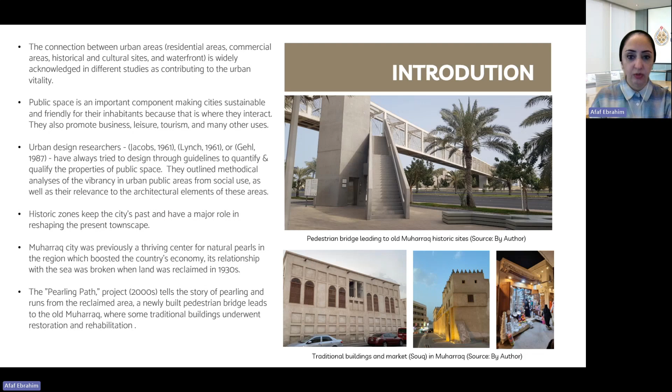Here comes the Saada Phase 2 development to fulfill this need. It is an extension of Saada 1, which is a mixed-use project located in the northeast side of Bahrain, and it is separated from the new site by Khalifa Al Kabeer Highway.

The new site is of a size of 11,223 square meters, and it is in close proximity to historical landmarks of Muharraq.

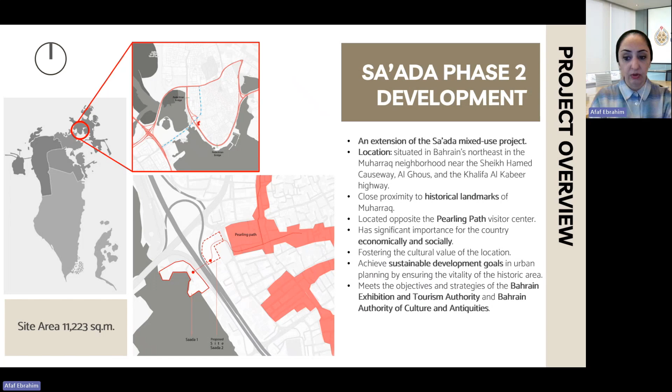It is located opposite the Pearling Path Visitor Center, and it has significant importance for the country economically and socially. It is fostering the cultural value of the location, and it achieves the sustainable development goals in urban planning by ensuring the vitality of the historic area. It also meets the objectives and strategies of the Bahrain Exhibition and Tourism Authority and Bahrain Authority of Culture and Antiquities.

The problems facing this project are that there is no connection to the waterfront, whether physically or visually, and it is lacking social interaction and cultural activities in this area. Also, it is lacking amenities and services as a public space.

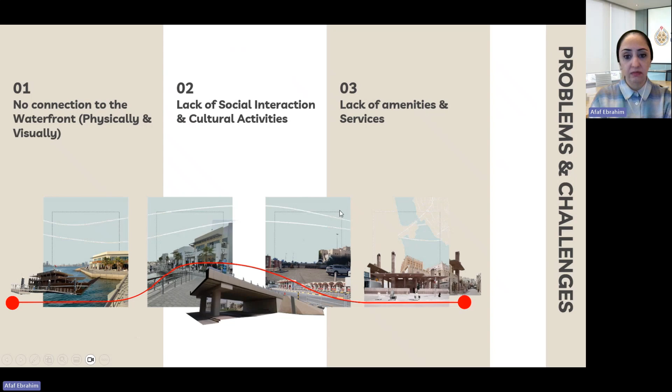The aim of this study is to offer a systematic analysis of how urban design can be utilized to enhance the connection between the past and the current architecture of Muharraq city. The study is particularly concerned with designing a public space and a pedestrian bridge, taking into consideration the city's culture and respective architecture, with an appreciation of contemporary design standards of such spaces.

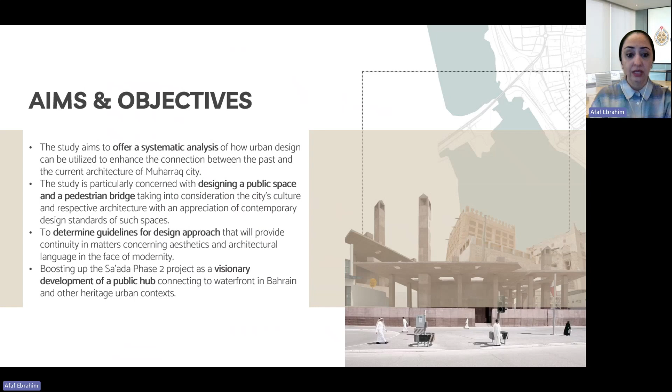It is also to determine guidelines for a design approach that will provide continuity in matters concerning aesthetics and architectural language in the face of modernity. It is also boosting the Saada Phase 2 project as a visionary development of a public hub, connecting to the waterfront in Bahrain and other heritage urban contexts.

The questions raised in this research to fulfill these objectives are: number one, what are the most important design factors to take into account when designing a plaza and a pedestrian bridge to link Muharraq's waterfront with its historic urban core?

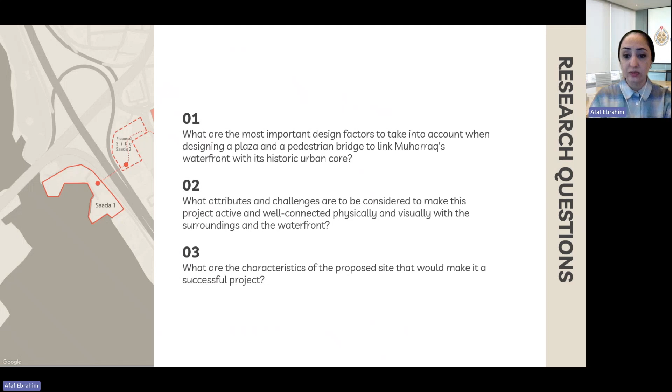And what are the attributes and challenges that are to be considered to make this project active and well connected physically and visually with the surroundings and the waterfront? It's also to determine the characteristics of the proposed site that would make it a successful project.

The research starts with a literature review to understand the design criteria determined in previous research for a vibrant public space. It also studies the historical context of Muharraq city as the main core of the project, and gives an overview of Saada development, both phase 1 and 2.

To answer the questions raised in this research, the study takes the focus group as well as SWOT analysis as a methodology, and the findings were analyzed and discussed to draw a conclusion where recommendation on design criteria is established, to highlight the limitation of the research and offer recommendation for future research.

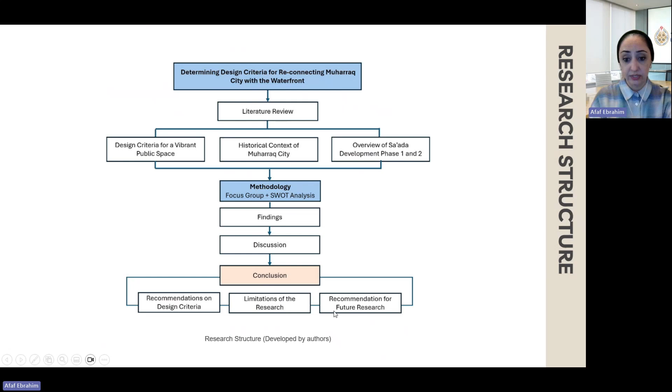The expertise in this field were invited to be participants in the focus group discussions. 11 of them accepted participation, with a range of architects, urban planners, real estate developers, representatives of Bahrain Authority for Culture and Antiquities, as well as academics and researchers in this field.

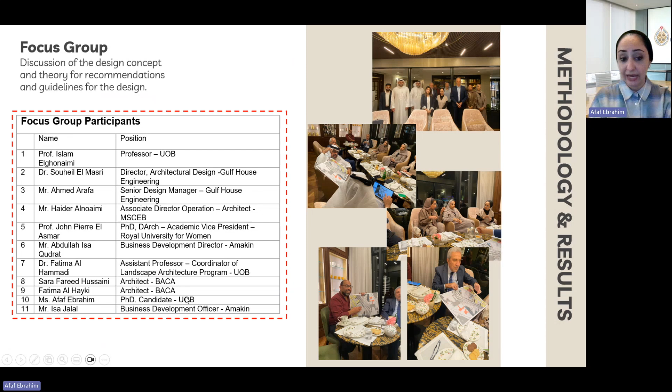The discussion's results highlight 6 important criteria to be taken into consideration when designing this public area. It states the importance of considering environmental and climate factors into the design.

It also highlights the importance of designing an active plaza, both functionally and socially, as well as considering the physical and visual connection techniques with the waterfront, taking into consideration cultural sensitivity and respecting the identity of the place, the accessibility both visually and physically, and the inclusivity of the site for different users. Last but not least, pedestrian safety and traffic integration into the planning of the design.

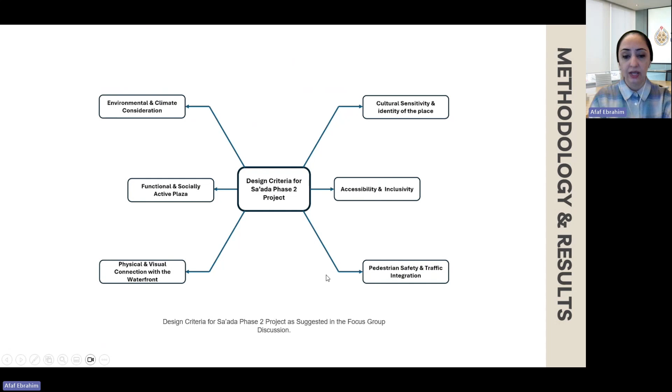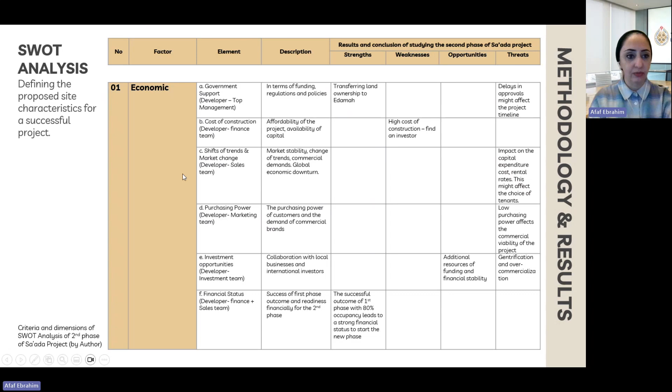To validate the results of the focus group, it was important to define whether the site has the main characteristics to make it a successful project. That led to a SWOT analysis, where 3 factors were analyzed: economic, environmental, and social, where all the strengths, weaknesses, opportunities, and threats were analyzed and determined.

As a result of this analysis, it revealed that the project has the potential in providing key factors for the vitality of a city based on theories of urban connectivity. It has the potential of connection with local community and heritage, is considered as a tourism destination and economic boost, has the features to be used as mixed-use development, and has potential in integrating environmental sustainability as well as social equity and inclusion.

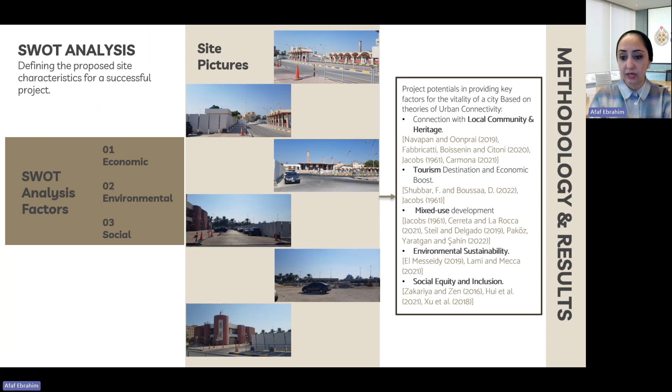As a conclusion, the study highlights the crucial role of Sa'ada Phase 2 in the connection of the old urban community of Muharraq with its waterfront, generating sociocultural benefits for Bahraini inhabitants and guests. It also highlights the focus group of expertise that determined 6 critical design criteria to be considered for a successful connection of Old Muharraq to the waterfront.

It also revealed the results of the SWOT analysis, showing the main characteristics and features of the proposed site for a successful project that fulfills the requirements as a public hub for a more livable city. By connecting the old city to the waterfront and enhancing the public space, the project not only helps in deepening the community's connection with its city's identity, but is also a great incitement to tourism and local commerce.

The study also encourages public participation and determining their perception, which can validate the findings of the study and ensure the implementation of users' needs.